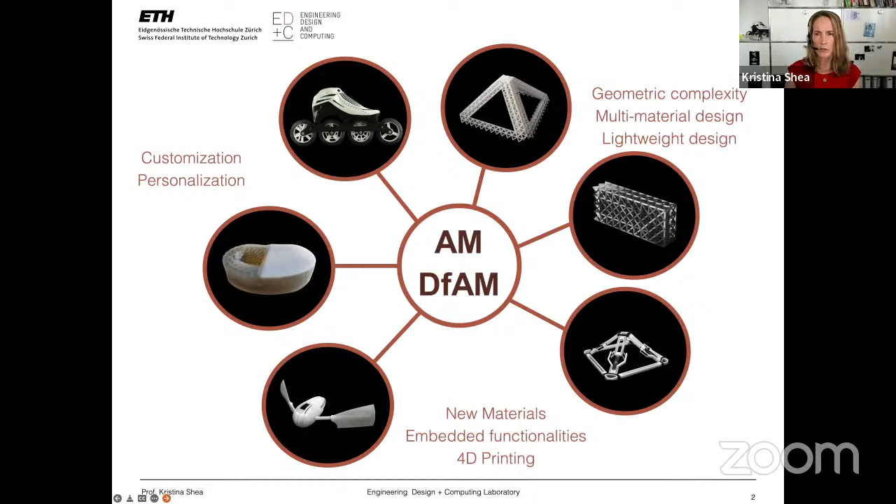We were exploring additive manufacturing and what it could do. For example, we started out by looking at aspects of geometric complexity, multi-material design, and lightweight design, and then moved into what new things we could do with this. This is where Chen's PhD work started: how can we use these new materials and embedded functionalities to create passive machines?

We also work a bit on aspects of customization and personalization. For example, a 3D printed spinal disc that uses multi-material 3D printing to be able to customize the design for a certain person. So we started off by looking at the tunability of multi-material 3D printed structures.

The process that we use for all this work is the Connex machine, which provides a certain set of materials, and we were looking at how we can tune the elasticity in structures. So if we have these three lattices, they are each printed with a slightly different material, and you get a slightly different deformation.

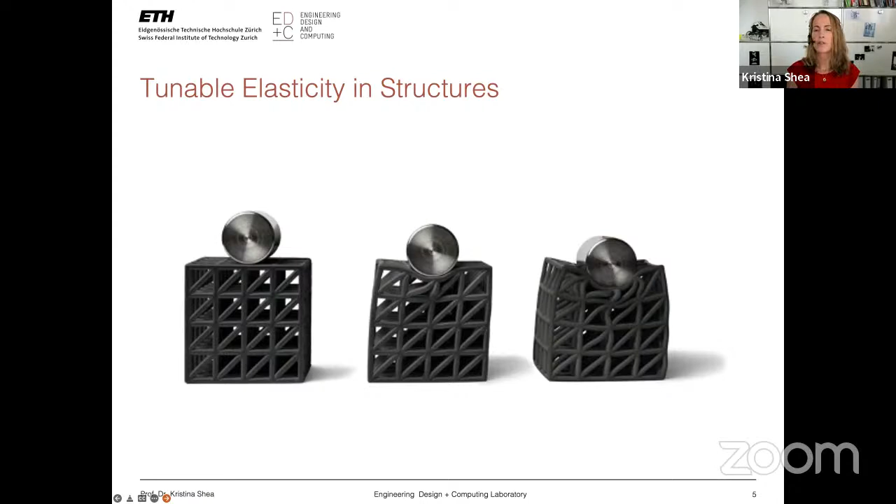We can use this to, for example, optimize lattice structures for the process, either using the multiple materials in the lattice to be able to adapt the structure, and also looking at aspects such as anisotropy in the printing to optimize for that as well.

Starting off from these lattice structures, we then quickly moved into 4D printing. This was also through an initial collaboration with Skylar Tibbits, who coined the term. 4D printing entails the multi-material printing capability of functional materials, meaning they transform over time.

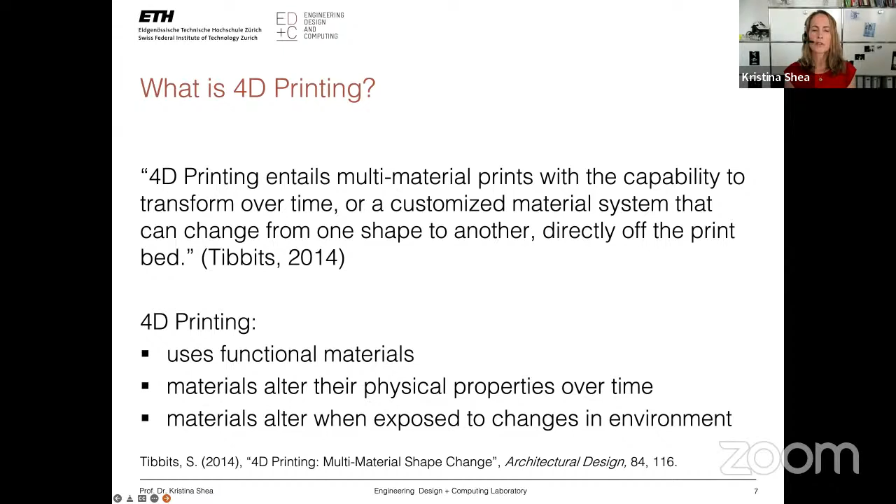The idea is that we can create structures and objects that change from one shape to another directly off the print bed, without embedding new components into the structure. So 4D printing uses functional materials. The materials alter their physical properties over time, and they alter when exposed to changes in the environment, for example temperature, which is what we use mostly.

So what this does is it changes the design problem from a traditional mechatronics one into one where it's the design and the material that creates the machine, rather than additional components.

So what's the potential advantage of this? Why would we want to do this? First, they're low energy—they use energy in the environment, for example temperature, to create their actuation. They're lightweight, since we're not using traditional components like motors, electronics, batteries, or tethers to power sources. This means lighter weight.

They're also more highly integrated and compact, so a deployable design leads to smaller transport volume and less assembly—for example, a deployable solar panel, as you see in the image on the bottom right.

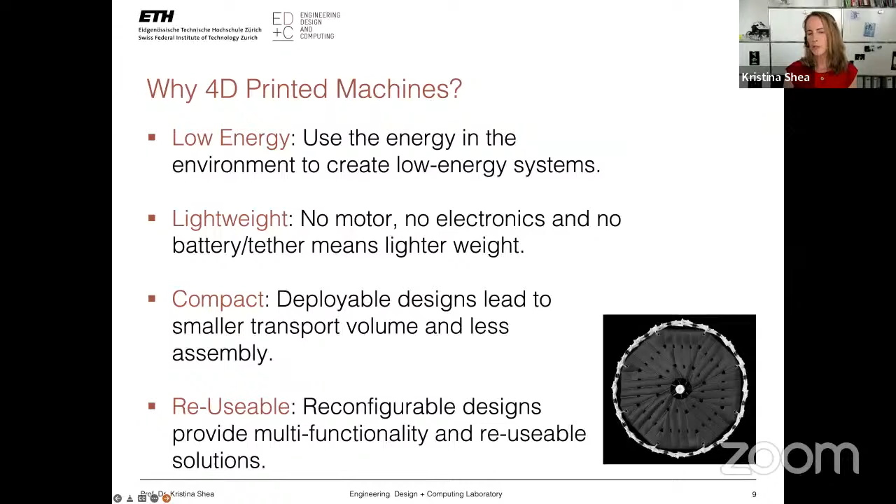And finally, they're reusable, so they can reconfigure themselves and provide this multifunctionality. These are the advantages that I hope to show you.

So with the PhD of Tian Chen, we started by, I asked him to design something that was flat and that could deform itself into, I think I said a pyramid, but he made a dome, which is great.

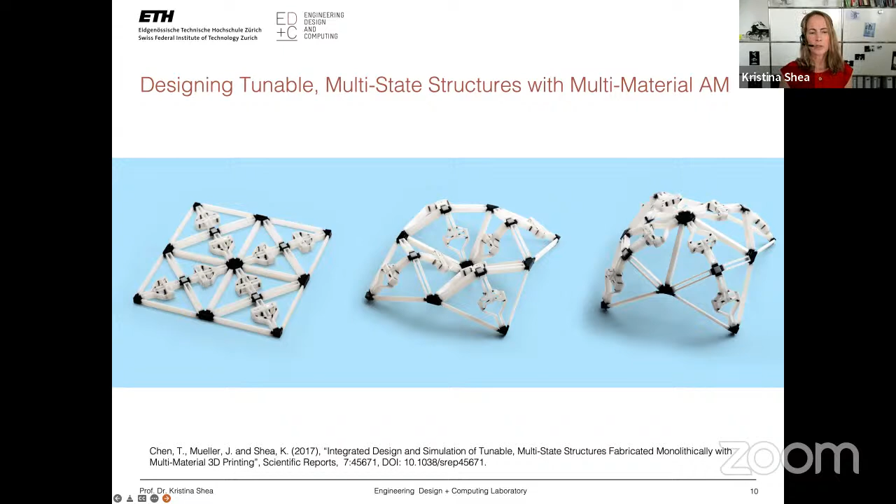So what he did is he created the structure that has bistable joints. These bistable joints are multi-material joints that when you apply a load, represented here by the nuts, they close the actuator. You could also open them, and there's a certain tunable force to be able to close and open these actuators.

This is also monolithically printed all together, so it creates this passive machine. And these are the designs that he can create with this.

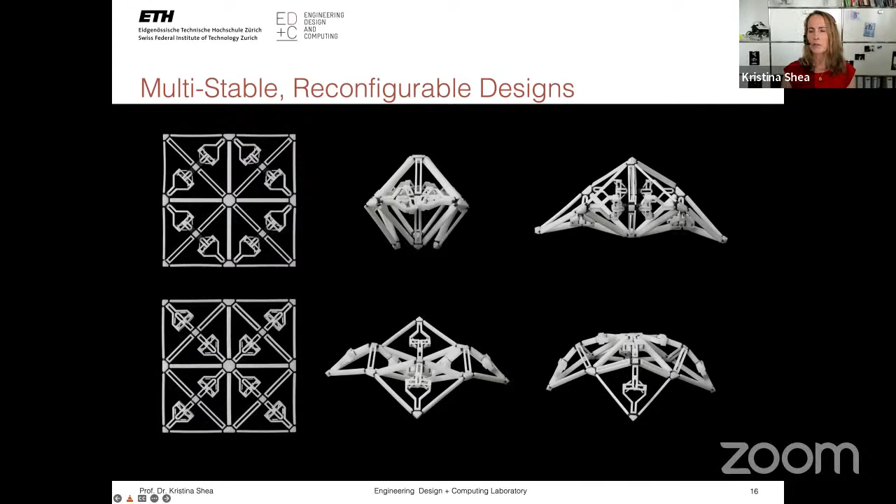He can create networks of these structures with the bistable joints that are reconfigurable, and in the reconfigured state, it's stable. They're also, in the future, load bearing. So from a simple design, a multi-stable reconfigurable design is created that can have these different states.

In our work, we also try to combine computational design. In this case, it was really just simulation via dynamic relaxation used to model the different openings or closings of the bistable joint to create the different designs. So we can simulate the possibilities here.

The next step was to be able to actuate these automatically. It turns out that these connex materials are shape memory polymers, which is highly advantageous for us. So the next step was to add these shape memory polymer strips to activate the structures automatically. It's still the same bistable joint, but here it's activated by these black strips you see in the middle.

They can be designed such that the timing is such that the first opens, then the second, and then the third. So that creates this passive actuation by temperature.

The work we do uses the shape memory polymer quality of the connex materials through a programming model. And the programming of a shape memory strip is different than computer programming.

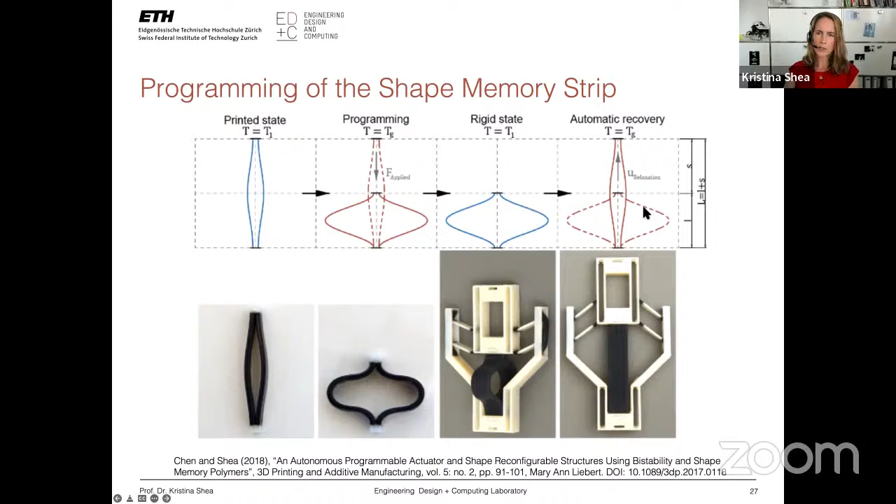What you have is a printed state, and then you heat it to the glass transition temperature, you apply a load, and then you cool it down in the third step. The final step is to recover it by heating it back up. So it's a very simple so-called programming process, but it's programming of the material.

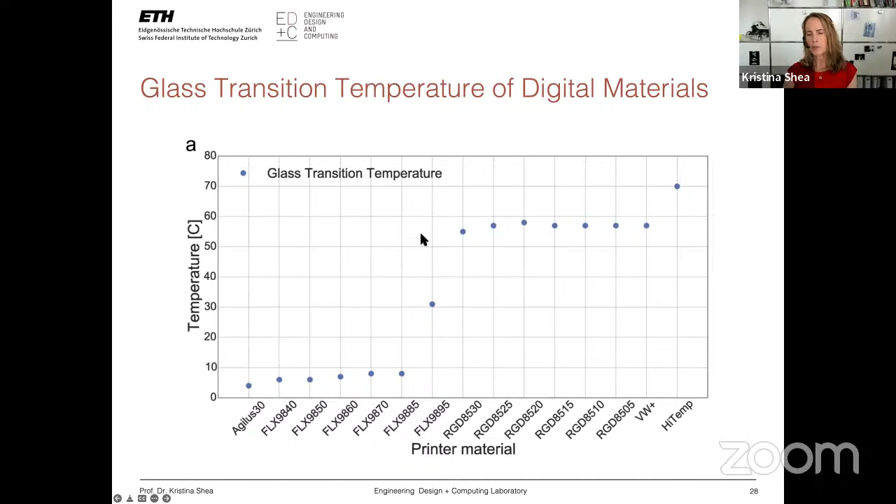We got a little bit lucky because these are the materials of the printer, and it turns out that the soft materials are down here, they have a low glass transition temperature. Then we have this one point of 30 degrees in the middle, and then we have a group, the rigid materials, at a higher glass transition temperature. So this is beneficial in the design to use these different properties.

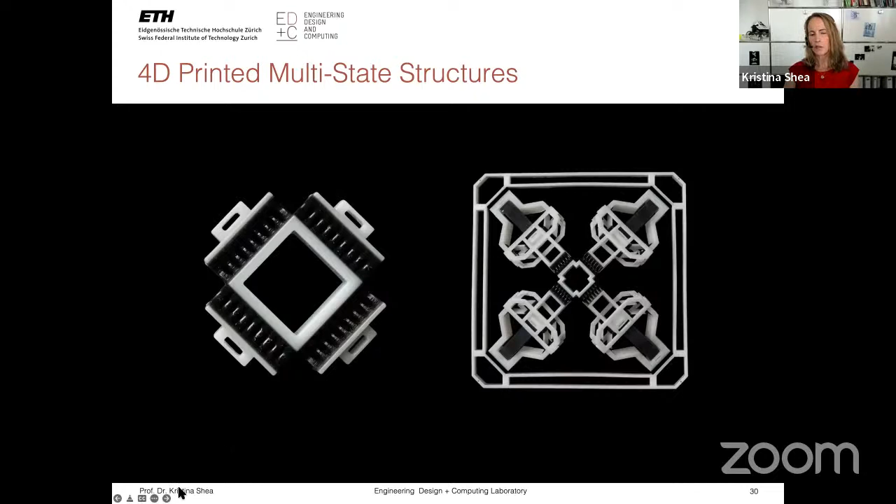What I think I want to bring out as well is that in these designs, it's very... I still love the details of the design. So this is the middle joint, and these details are also what makes these designs work. It really is the design and the materials in a very elegant way to create these passive structures. So here what you see is the structure.

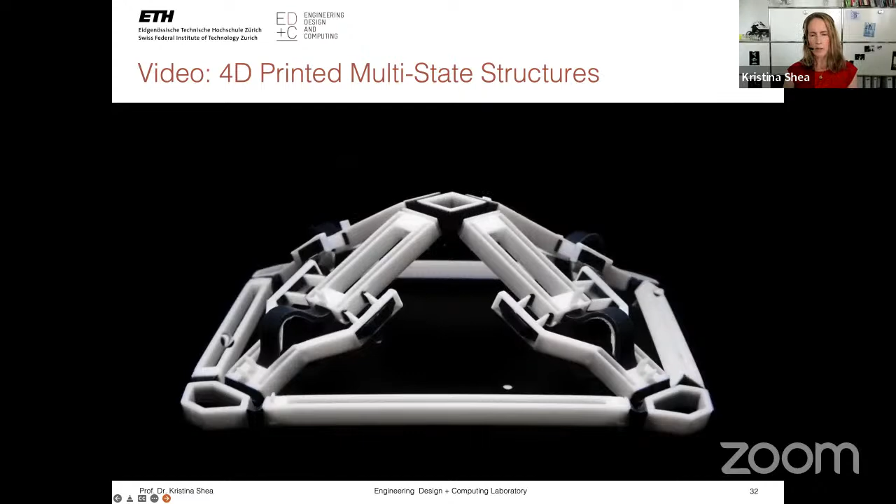It's in a temperature bath, a water bath for the temperature, not that it needs the water, but it just provides uniform temperature. And you can see it pushes out into a stable state through these shape memory polymer strips. It's load bearing, which was unique at the time when this was published.

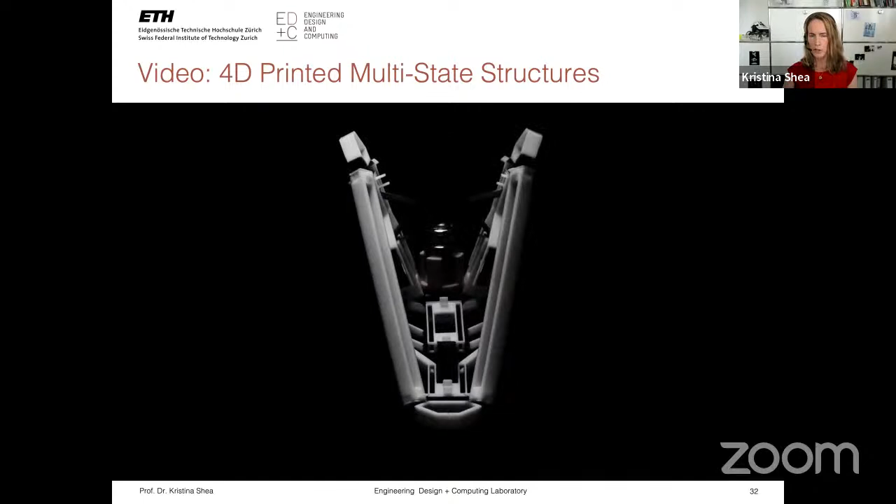And it can also move to, I'll just fast forward a bit, move to another state. In this state, it also carries a load as well. So these are these multi-state structures, and this was a big part of Tian's work.

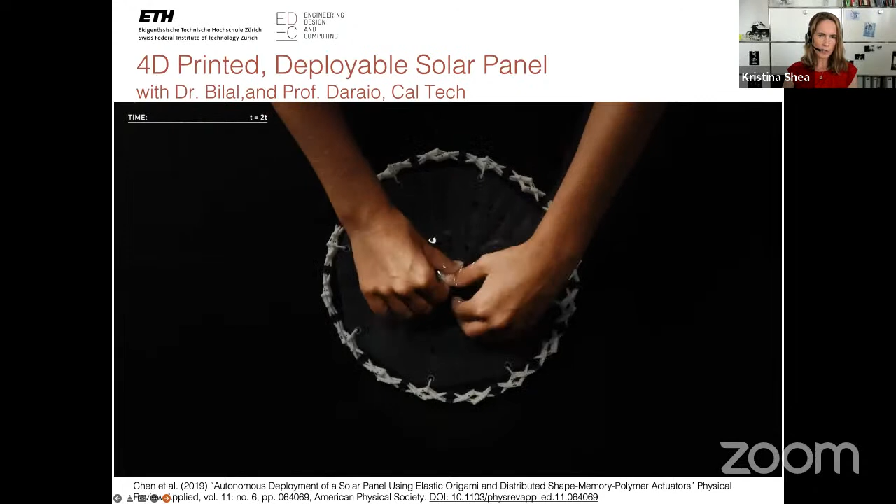Another project that he carried out with Dr. Bilal and Professor Daraio at Caltech was to use the principles of this to create a deployable solar panel. So here's the solar panel, it compresses to 10 times.

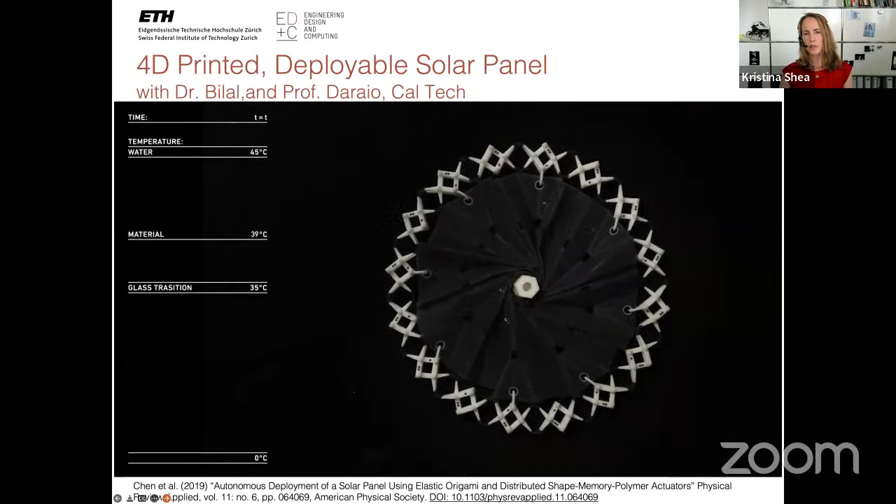So it's again this material programming aspect, and then it will expand out using a scissor mechanism on the outside, also with some shape memory polymers. So it expands out in about less than a minute, expanding 10 times in less than a minute. There you can see the joints, the rigid and soft materials next to each other, and here it's going up to a temperature of about 45 degrees. So it's using the temperature to actuate - there's no single individual actuators on that.

So the next example I want to show you in this area is 4D printing for shape morphing. While I like to look at machines and creating passive machines in our group, the last two PhD students who worked on this topic looked at shape morphing. The reason is that we wanted to go back and look at the computational design tools and methods that could be developed to help designers and engineers create these 4D printed structures.

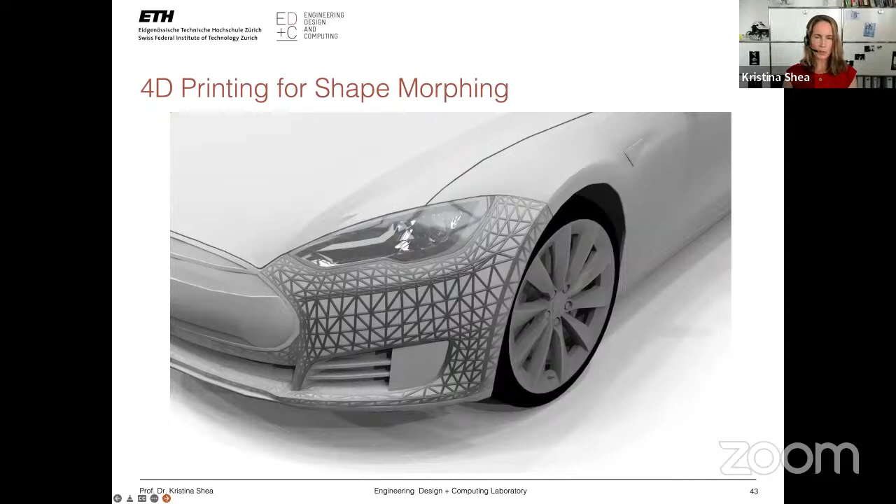And so we all know and like lattices. So we went back to this saying, okay, if you had for example a car body and you wanted to change the shape of that to improve aerodynamic performance - so it changes shape in response to, let's say, pressure - that would be a nice application of 4D printing. We actually had a project with industry on that. It could also be a shape morphing airplane wing as well.

And here the principle we're going to use is a bit different. So here are the materials, same materials I showed you before, and same glass transition temperatures. But now this work was done by Thomas Lumpe in my group, and what he did is looked at the change of the Young's modulus when you heat up the materials. So before we were looking at this glass transition temperature and the programming of the material. Now the switch is to say, okay, what happens to the Young's modulus and the compliance of the material as you heat it?

So when you heat the material, he's looking at these two materials: the high temp material and Vero White, which is a rigid material. You see here on the right-hand side that the Young's modulus, when you heat it, changes not uniformly between those two materials. At this temperature, about 65 degrees, you get a big spread between the Young's modulus. He used the 80-degree temperature because it was just more reliable - these temperatures aren't exact when you're heating the materials. There, the difference in the Young's modulus is 305 megapascals and 8 megapascals.

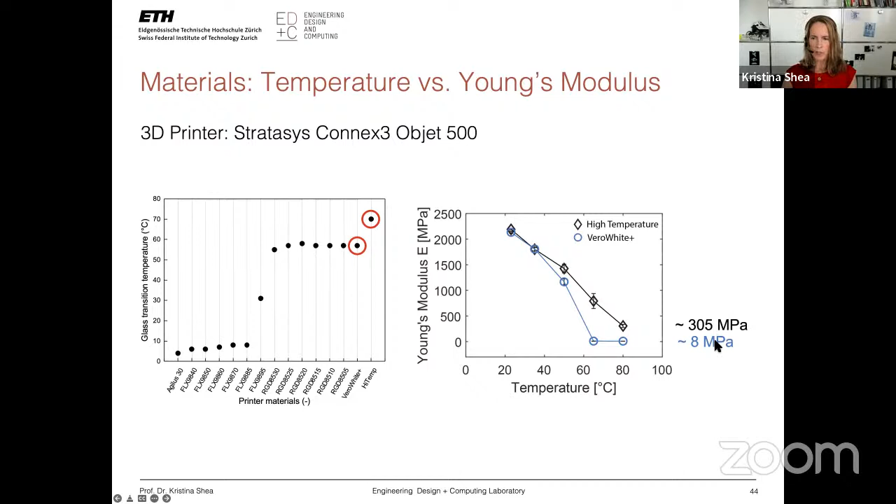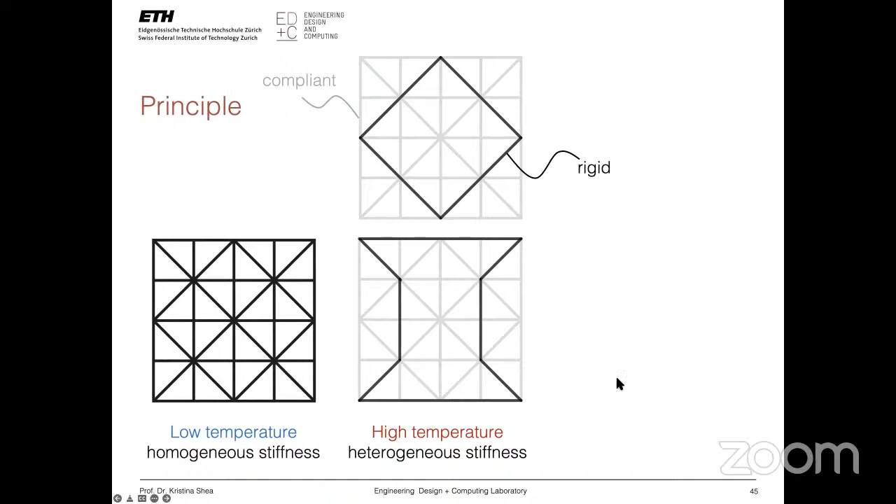So it's significantly different, and so he wanted to get rid of this programming step that was needed for the bistable actuators that Tim had. What he thought of is, okay, if we have a lattice structure at a low temperature and we have a homogeneous stiffness, then what happens if we add in some compliant members and some rigid materials? In this case, we can then heat it up and get heterogeneous stiffness. In the heterogeneous stiffness, the structure will deform. So we apply a load and get simple actuation and a desired deformation, without programming individual members like you saw previously. So that was the goal.

So this creates a different type of programming cycle. We have a lattice structure, we heat it up, in this case to 80 degrees. We apply the load, and then we get the deformation depending on the distribution of the materials in the structure. We cool it down, it locks that into place, and to recover back to the initial state, we heat it back up again. So you still get this programming cycle, but you don't have to program individual members - you program it all together.

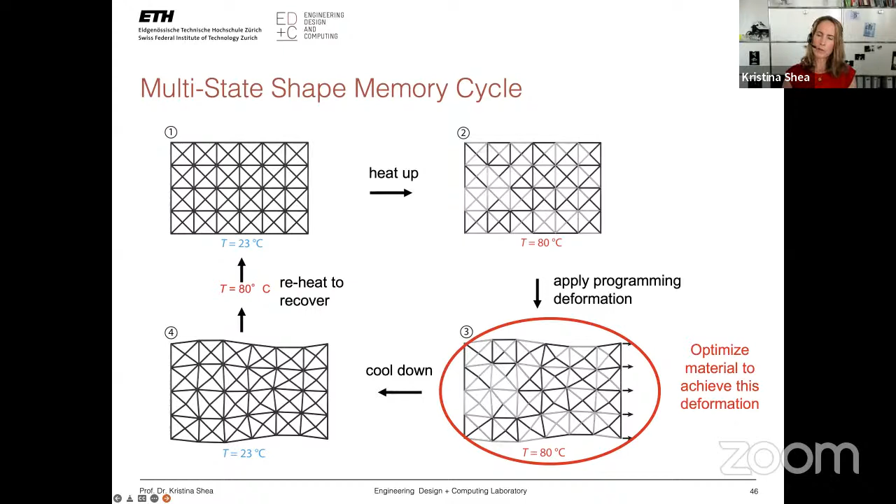And so it became an optimization problem - to optimize the material distribution to achieve this deformation. The optimization problem is: we have a lattice structure, and we're going to optimize for a given deformation U, subject to the normal finite element equilibrium equations. These are just considered simple truss bar members. What we have is we want to use these two materials and distribute them in the structure, and he uses a penalty function to do this. So he creates an optimization model that initially uses gradient-based optimization with the penalty function to create the initial distribution.

And then the second step is done by a genetic algorithm to push the members in the structure towards the two different materials, and then you get the optimized structure.

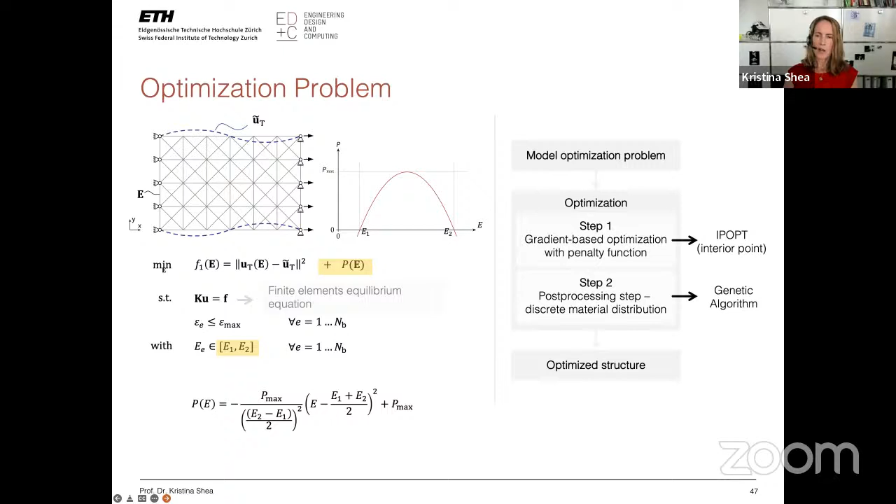So I'll show you the results here. We have 3 different examples. It starts with 2D on the left-hand side with 154 bars, then we have 896 bars in the middle, and 3,516 bars on the right-hand side.

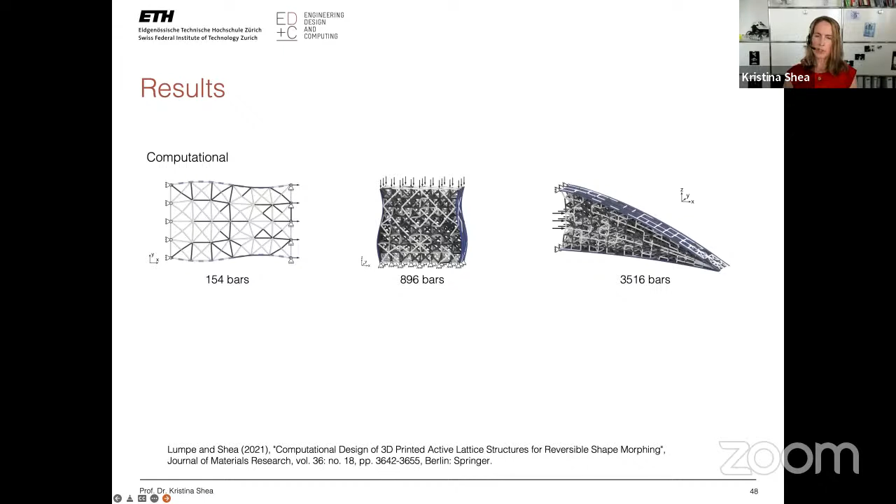Okay, so I'll just wrap up with a few conclusions and challenges. So what do 4D printed machines offer? They're low energy systems, so they're using, in our case, temperature, but they could also be activated based on other things like light or pH and so on in the environment.

They're lighter weight and use less material in comparison to traditional actuated systems because we don't have the actuators, especially the motors and so on. They also create a more integrated system in that way. They have a smaller print and transport volume, especially when we're printing something flat and then deploying it up. And they have multifunctionality and reuse and provide some new functionalities.

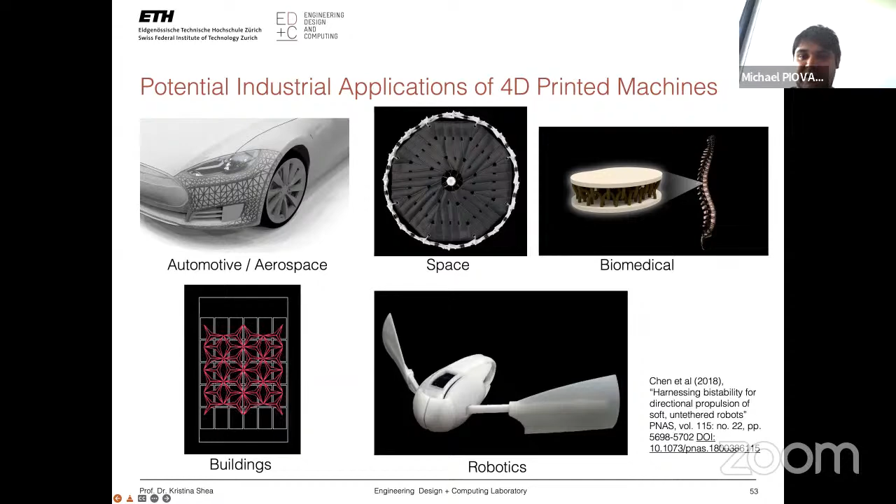The first question I have is with regards to the monolithic manufactured materials. Did you investigate how often they can be actuated before they break? Are they durable? Yes. So I used to have in this list of 4D printing challenges the fatigue or reliability of the materials we have. It depends on the design, of course.

I think in Tim's examples, if I remember right—Tim, correct me if I'm wrong—it's about 20, 25 times, and it really depends on the joint design. That's where, especially with bistable structures, the joint design is so important. I still love looking at these models in my office because I know the sweat and work that went into making structures that can deform that way. It's not easy at all.

For this, I have a follow-up question. Are the materials sort of just designed by someone else and then you adapt them? Or do you also have collaborations where you specify what kind of properties you'd like for the material, and then ask material scientists if something like that could be developed?

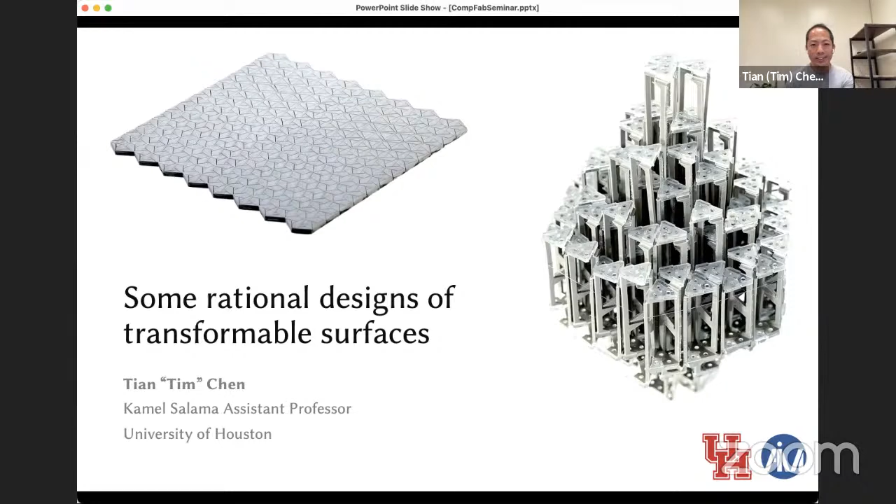These are two works, one of them is actually really recent. In all of these works, we're always trying to do this matching. We're trying to find a structural material system and then abstract their deformation so that we can use some sort of mapping to go from 2D to 3D, or from one 3D state to another 3D state.

In my PhD already, we started to look at this with Kristina, over the course of a summer, to see if we can use Chebyshev net to calculate exactly how much we need the diagonals of each square element to lengthen or contract in order to get a predictable Gaussian curvature. That's the first work I did in that topic.

Moving to my postdoc time, we started looking at conformal mapping to be able to abstract this deformation. But then, of course, we need material systems that can expand isotropically. And lastly, we started looking at anisotropic contracting or lengthening.

So this is a prototypical system. We have these air channels, and when you inflate them, the lateral direction contracts because it goes from, let's say, the length to the diameter, whereas the length of the tubes doesn't really change. This is kind of exactly the reverse of a liquid crystal elastomer channel, which lengthens in the length direction while the diameter doesn't really change.

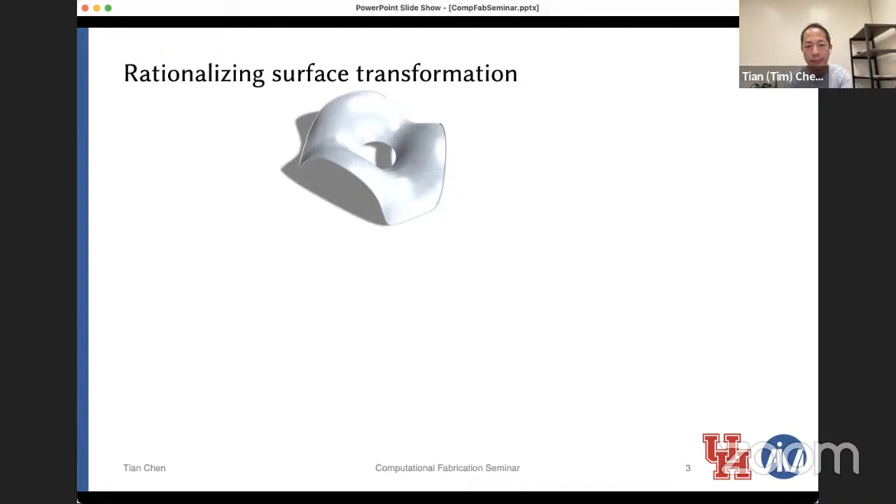Using the exact same differential geometry concept, we're able to come up with two different material systems, actually more than two, but these are the two I worked with. One uses kirigami cutting of a rubber sheet to go from the 2D to the 3D state in a bistable fashion. When it's in this 3D state, it can stay in that state.

The second, very recent work, not yet published but I think I can talk about it now, is in SIGGRAPH of this year, which uses umbrella mechanisms to go from a very compact yet 3D state to a much larger 2.5D surface, even though the underlying algorithm is actually really similar.

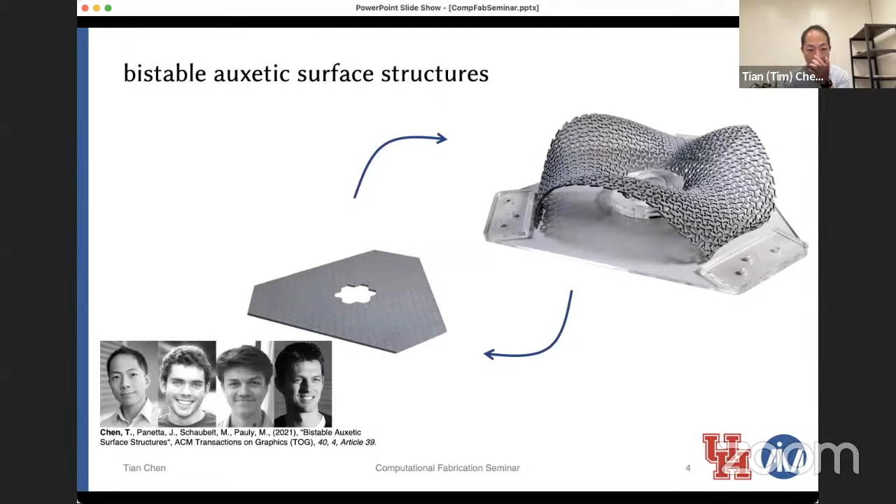So to talk about the first one first, bistable auxetic surface structures. These are my collaborators and advisors at EPFL. We start by looking at the regular linkage deployable systems that was done before I arrived.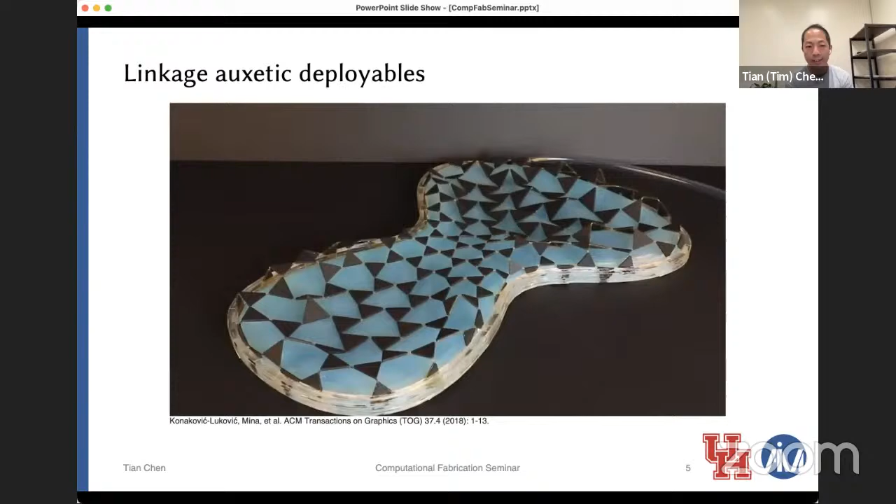This requires a linkage system with triangular elements, and we need some sort of actuation mechanism to make it go from 2D to 3D state. And there's always the lingering question of what happens at the boundary.

With bistable auxetics, we've pretty much seen this already. With a regular linkage, you can expand to a factor of 2 in length. Yet with the bistable triangular auxetics, even though the base material is exactly the same rubber sheet, when you expand this, it stays expanded. You have to apply mechanical force to have it go back to the original state. But because the expansion ratio is the same everywhere, you just get a bigger sheet.

So my question is, can we design a planar surface that encodes its desirable 3D state and have it deployed to that stable 3D state? And then we can define the mechanical characteristics in that 3D state.

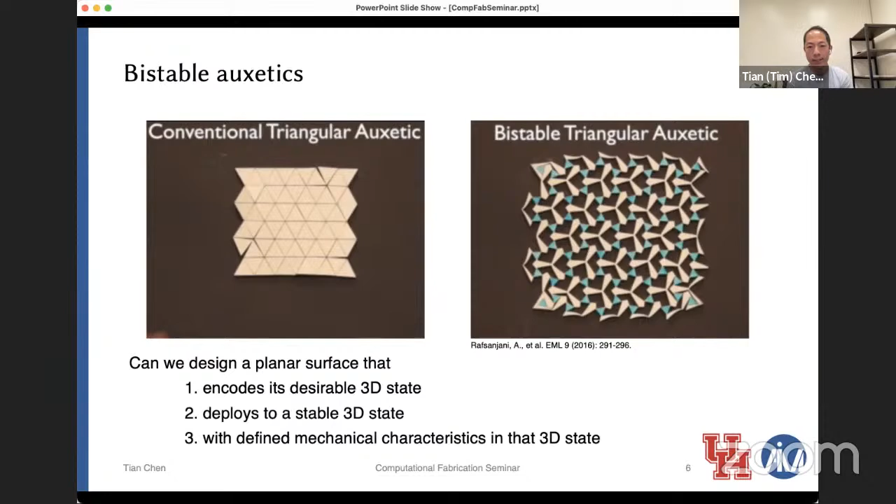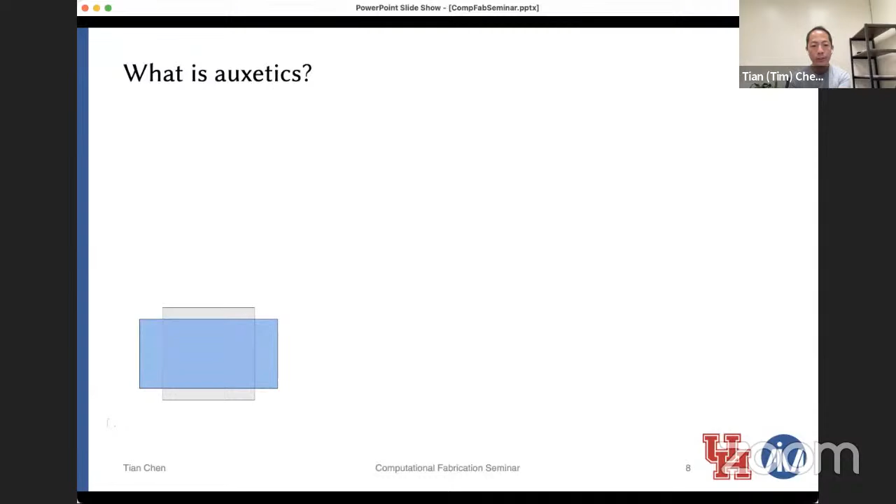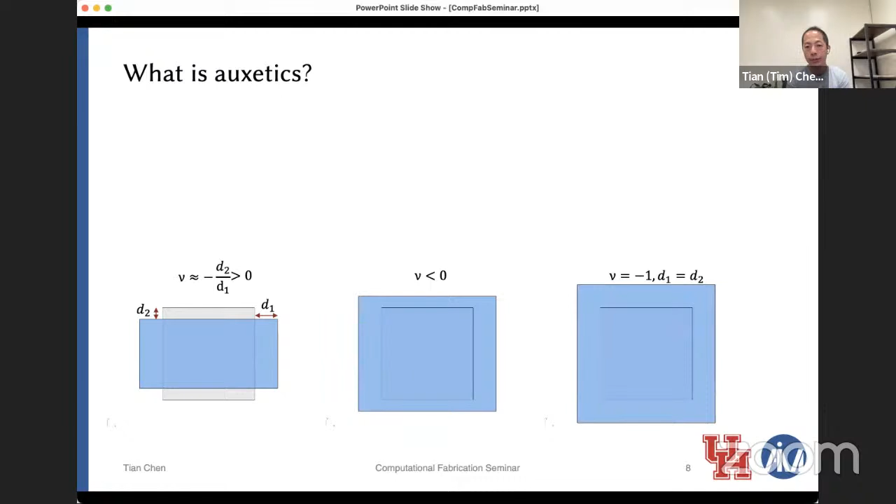So first, what is auxetics? I'm sure most of you are familiar with this already, but to reiterate: a normal material when pulled contracts in the other direction. We can define the Poisson's ratio as roughly the ratio between these deformations. Then we have materials with a negative Poisson's ratio, so when tension is applied in one direction, it also expands to some degree in the other. And then we have materials with exactly a -1 Poisson's ratio, so we deform exactly the same amount in both directions.

Fortunately, we see that this regular triangular linkage does exactly this. If we look at each hexagon as if it's a solid element, it exactly expands isotropically in a Poisson's ratio of -1 fashion.

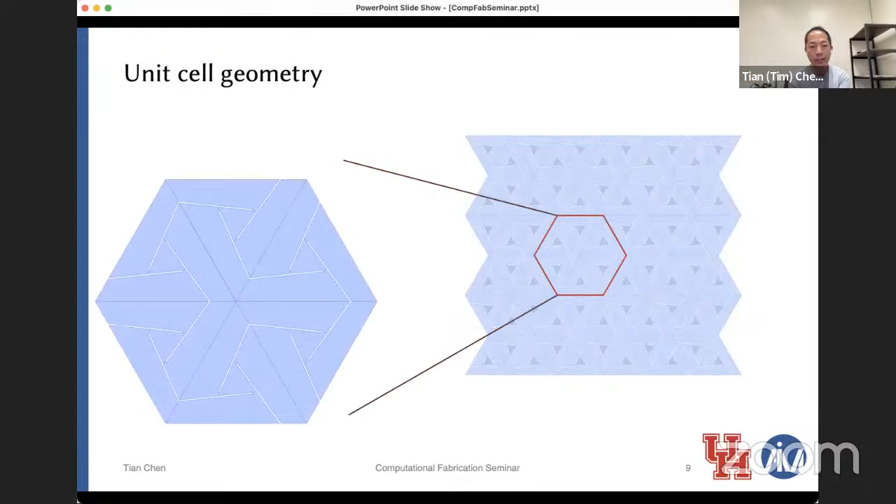So let's look at the unit cell geometry of the actual cutting pattern. We can abstract this into a hexagon featuring 6 mirroring triangular elements with these cuts, and parameterize this by focusing on the triangle using T and theta.

We look at the rotation of the inner triangle to establish the deployment. By changing theta, you're actually changing the orientation of the cut line, making the inner triangle smaller and smaller. Changing T does exactly the same thing. So just by intuition, you can see that the smaller the triangle is, the less expansion we're able to get.

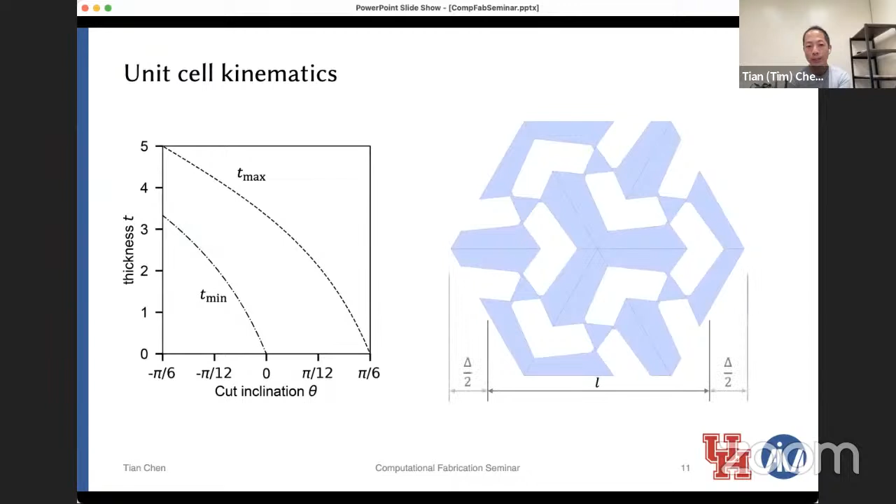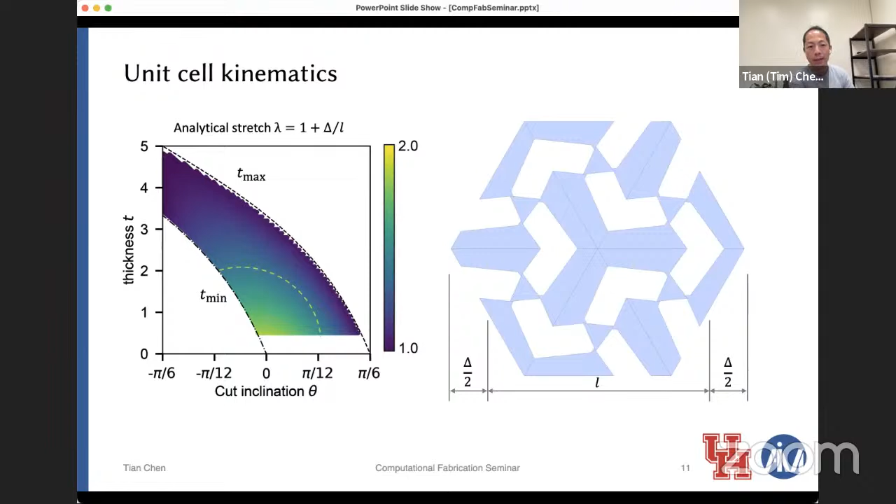So if the original length is L, we can through kinematics calculate exactly, or predict exactly, what the expanded state is, and we denote this as delta. Through some equation manipulation, we calculate the expansion ratio, or stretch, which ranges from 1 to 2. What's interesting, if you look at the color map, is that there are some isolines, meaning there are different parametric combinations that give you the exact same stretch factor. So now we have an additional variable to play with.

And we turn to mechanics to answer which unit cell we should pick to get us the expansion ratio we want. So to study the mechanics of these unit cells, we first tried to do an experiment.

Building this very complex experimental setup that replicates this periodic boundary condition, we're able to mechanically test the expansion behavior. This was quite successful in terms of getting the final state, but not very successful in getting the intermediate forces, because each unit cell kind of snaps at a different time. So when you look at the force displacement curve, it's a mess basically until the very end. This isn't exactly what we need, because we need to know the behavior of each individual unit cell at all stages of the stretch.

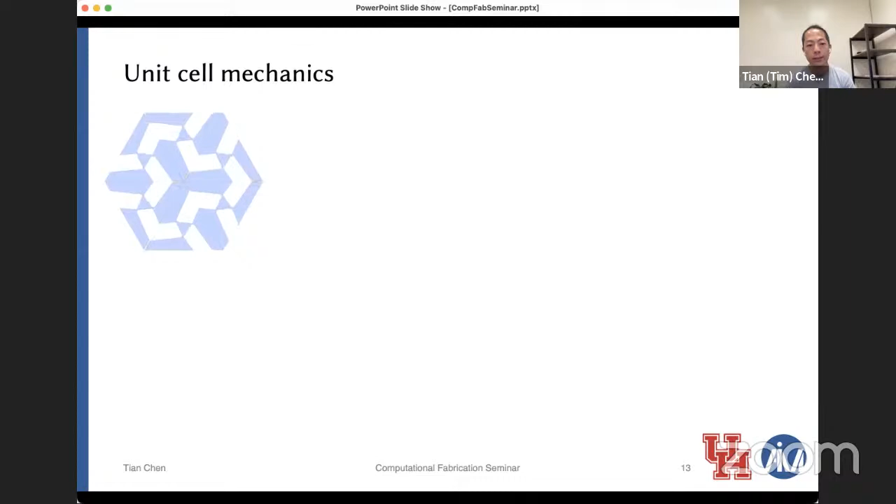So we turn to FEM, and we notice that there's a quantifiable strain that happens at the middle of the expansion, which I denote here in red. These red regions are actually the stretch of the material, and this red region closes up once we fully expand the unit cell, back down to a completely kinematically compatible state.

So we built our own unit cell simulator that attempts to minimize the total energy of the system by applying an average deformation gradient. Then we're able to calculate from there.

Here's the strain energy versus strain diagram from the FEM simulation. You can see there are two local minima in the strain energy landscape, indicating there are definitely two stable equilibrium states. And since we can easily differentiate this curve, we get the force versus strain diagram typical of a bistable system. So now, what do we pick?

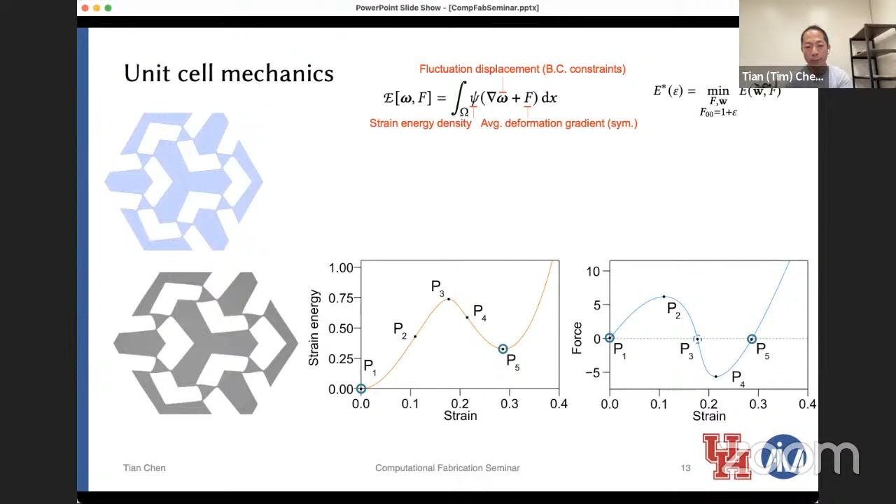Knowing the mechanics of the unit cell, we have different criteria we can use to pick the most ideal unit cell for the purpose. First, the strain of the hinges plays a significant role in determining the stability of the structure. So the first choice is the difference in energy between the unstable equilibrium, some intermediate state, and the second state, which is the deployed state.

The second thing we can optimize for is the slope at the second equilibrium state, which is exactly the tangent modulus of the system at that point. This gives us as stiff a system as we need in the deployed state. So that's what we're going to use.

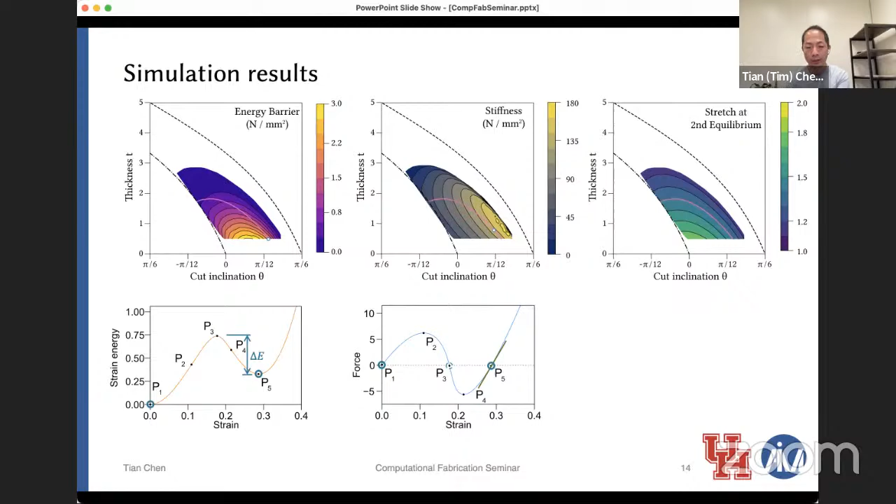Unfortunately, if we plot the contour map with these two quantities in mind, the maxima don't occur at the same place. So by maximizing for one, we have a trade-off with the other. But that's okay, so we choose stiffness as our criteria for picking the unit cell.

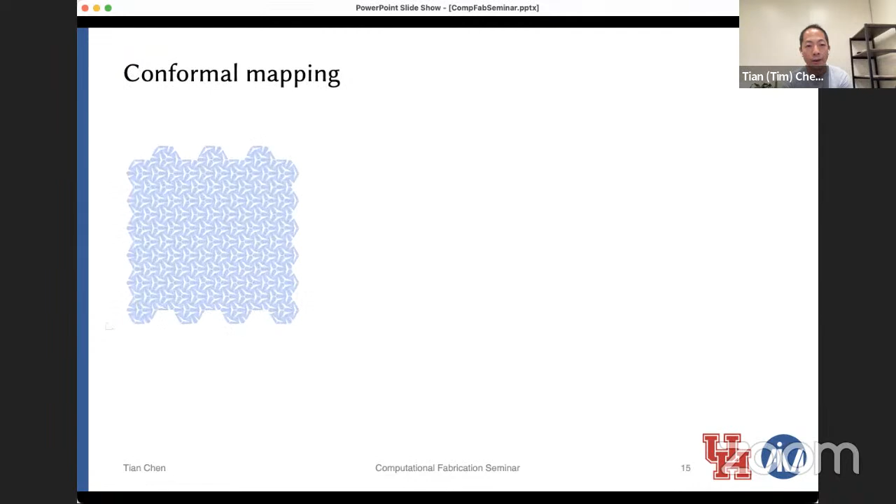So now we go to the conformal mapping part of this. As I said, if I tile the same unit cell everywhere, I just get a planar expansion of the structure, which isn't what we need because we already know how that works.

Taking inspiration from cartography, where we map a globe down to a planar surface, due to distortion we have Antarctica and northern Canada appearing much bigger than they actually are. We know we need to change the area of each square without changing the angles between the local elements.

If we can satisfy this condition, then the deformation is conformal, and we can calculate the Gaussian curvature based on the difference in the length change of neighboring elements.

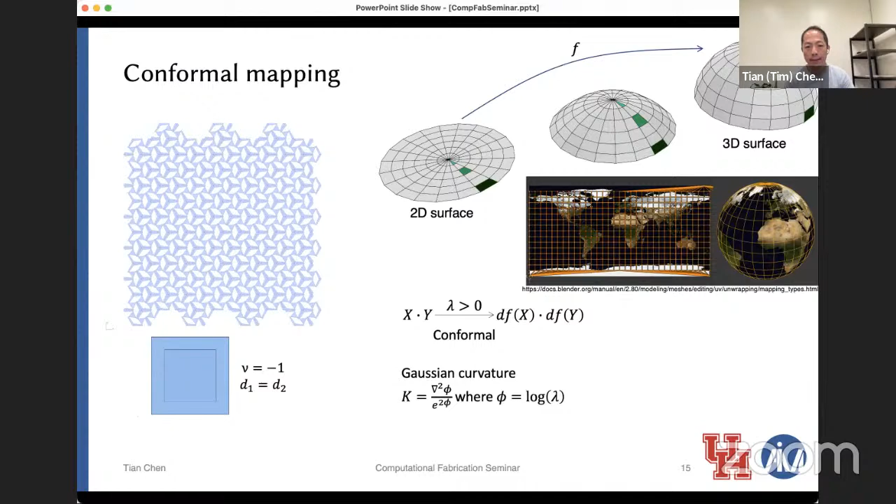So we have a generative algorithm in mind. Given an input surface, we first calculate the conformal factor that allows us to flatten this into the planar state. Here I'm using light green for a lot of expansion and blue for almost zero expansion.

Then we look up our pre-computed table to find the parameters that give us that particular scale factor. From these parameter combinations, we find the unit cell with the stiffest behavior, and tile them back into the planar state with different parameters, triangles tiled together. Then we can easily deploy this into the 3D state.

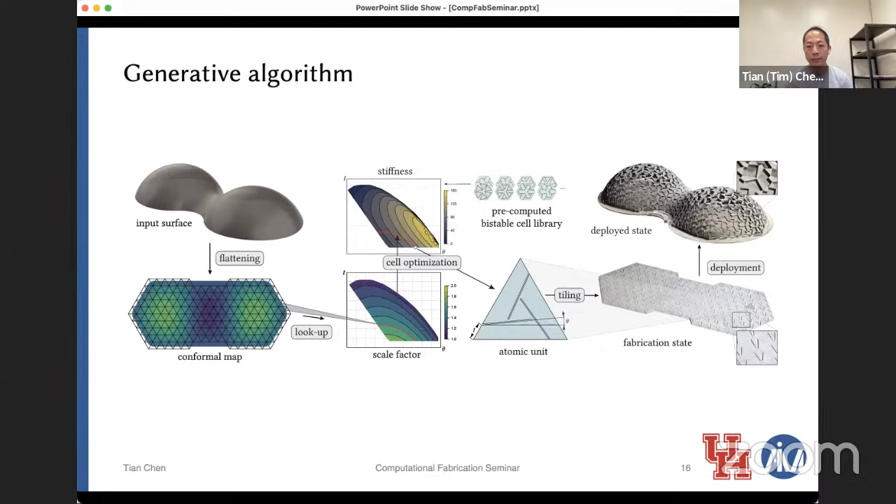One thing to note is the boundary condition. The boundary is largely free, except in very limited places where we need a bit of support, otherwise it tends to flatten due to isometric deformation. Otherwise, the structure is freestanding.

With a simple example of a spherical cap, we intuitively know the middle needs to expand more than the edges. We can vary whether the middle expands a medium amount and the edge expands none at all, meaning we can clamp the edge if we want, or the middle expands a lot and the edge expands around the medium amount.

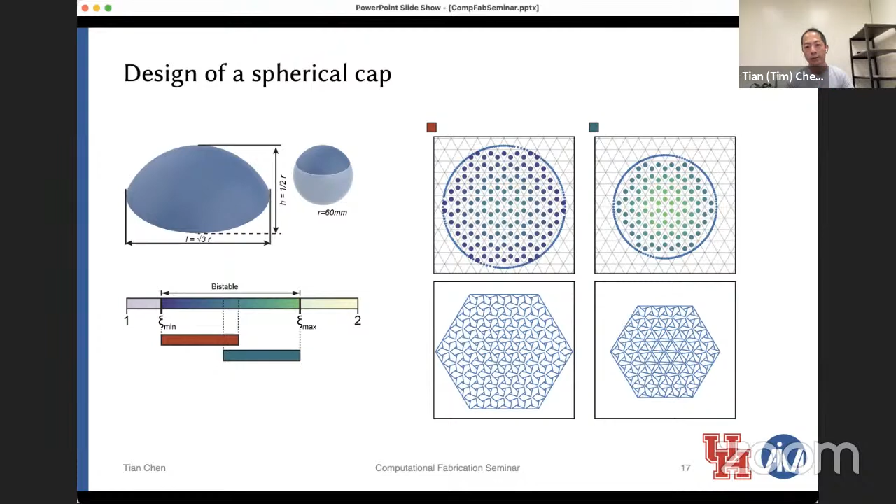For deployment, this material isn't smart or functional in any way, so we need to use our fingers to deploy this. Fortunately, the snapping of one unit cell triggers the snapping of the neighboring unit cell, so the deployment remains quite easy.

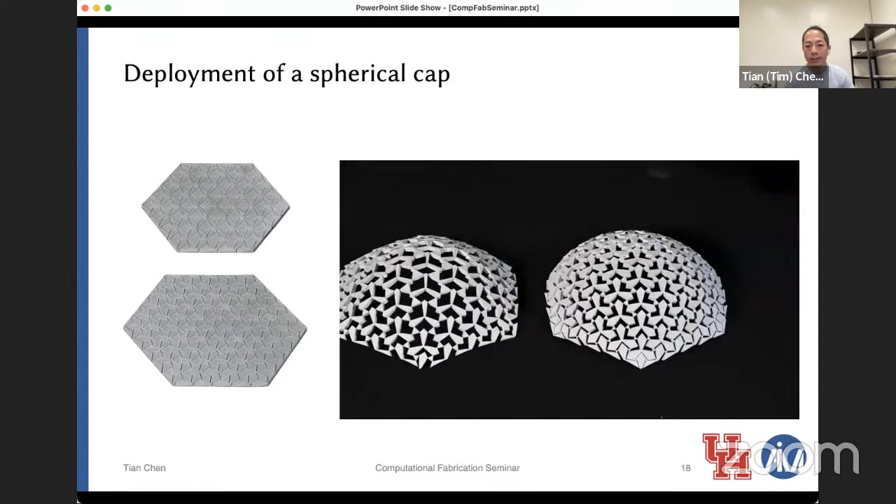And of course, we can use photogrammetry to construct the 3D geometry, or we can use other techniques like CT scanning, for example, to get a more accurate view of the geometry. But either way, it gives us the structure that we need.

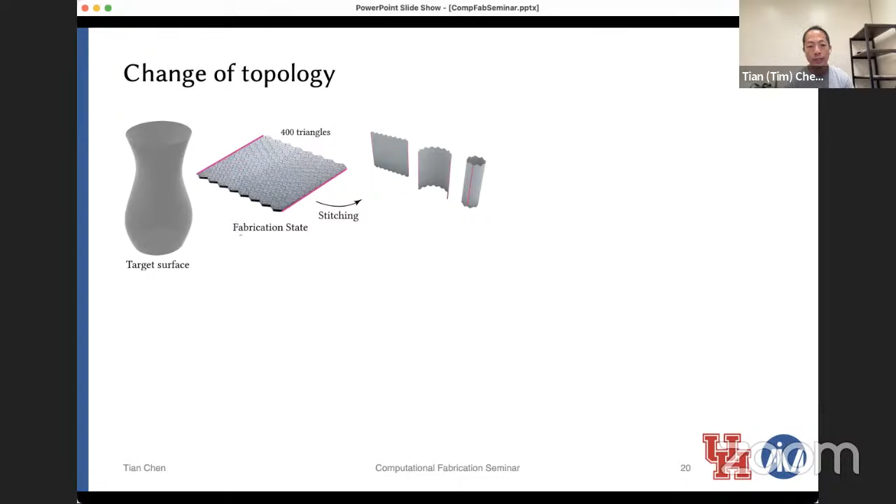We can also change the topology of the system. We can have a target surface with a cylindrical topology, still fabricate it flat, and then glue the seam together prior to deployment, because we know the triangles will rotate in a compatible manner. So we have a cylindrical system first, and then deploy this into the vase shape we wanted.

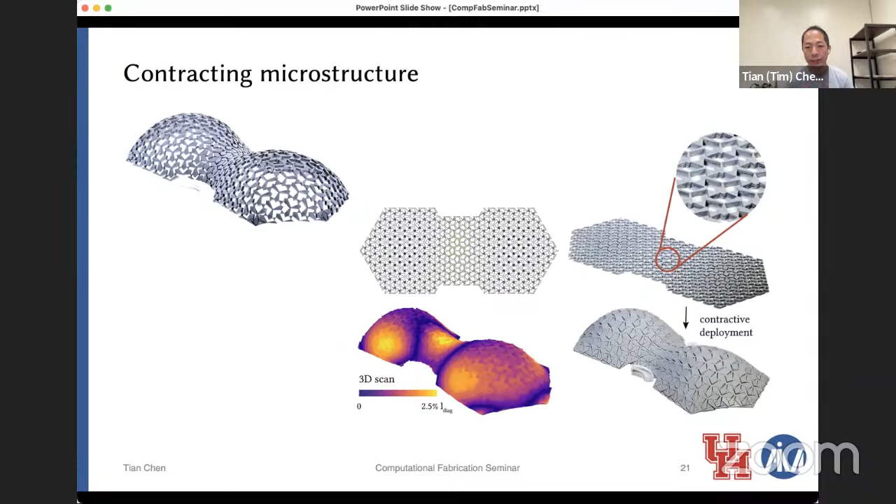There are other techniques we can use. Since the Gaussian curvature is controlled by the change in length between neighboring elements, we can have different contractions happening between neighboring elements to create a porous planar state that deploys by contracting into a more or less continuous 3D state. And of course, we can make more complex geometries too.

Keep in mind we do this because the fabrication is so simple. We just take a commercially available rubber sheet and laser cut it, and we can produce these sheets almost in mass.

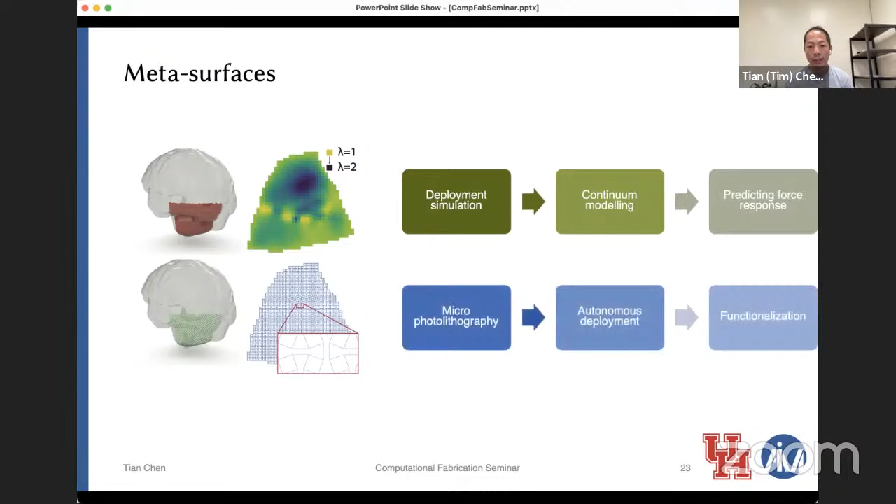What's next? This is a very good tool to use because it's scale invariant. As long as we can satisfy the expansion ratio, we can make this as big or as small as we want. So currently I'm working on figuring out how to simulate the deployment of a whole sheet, and how we make this much smaller or much bigger.

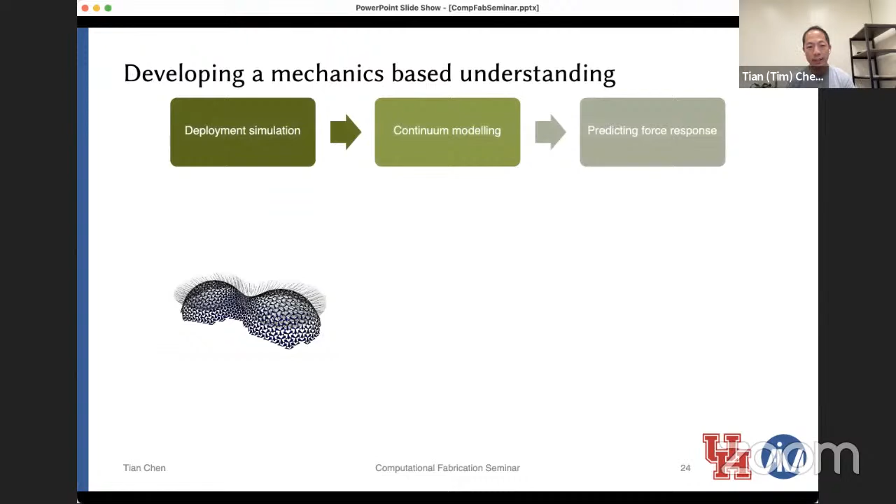For deployment, it's a bit tricky because each unit cell in itself is bistable, so we have a lot of negative stiffness areas to consider. So far we have limited success deploying arbitrary structures. The next technique we may use is to abstract the mechanics of each unit cell into a continuum element.

Lastly, we did some preliminary tests on the mechanics of these structures. Keep in mind, during the design we don't consider boundary conditions at all, so of course this has to sit on something. By placing a dome structure on the table and applying a load at the apex, we're able to measure the reaction force, and judging by how predictable it is, I think it is doable to figure this out experimentally and numerically.

And lastly, how do we make this much smaller? As I said, because it's scale invariant, we can totally use techniques in the micro photolithographic arsenal, using wafer technology to make these.

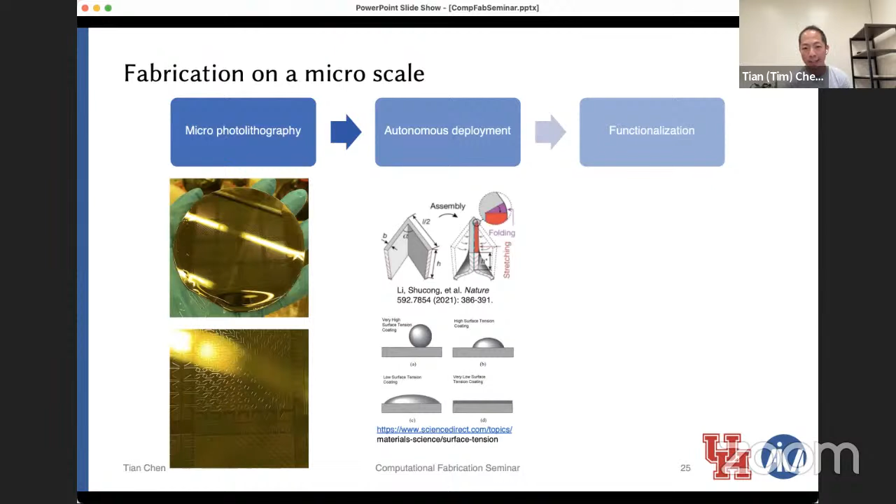And how do we deploy this autonomously? Using what Kristina mentioned about 4D printing, how do we deploy this without using my hand? And lastly, how do we functionalize this to achieve an engineering kind of application?

So these are some of the future directions for this project. Now I'm going to talk a little bit about the newest work we did, which, like I said, is based on the exact same technique. But as you can see, this is a 1-to-1 scale geometry here.

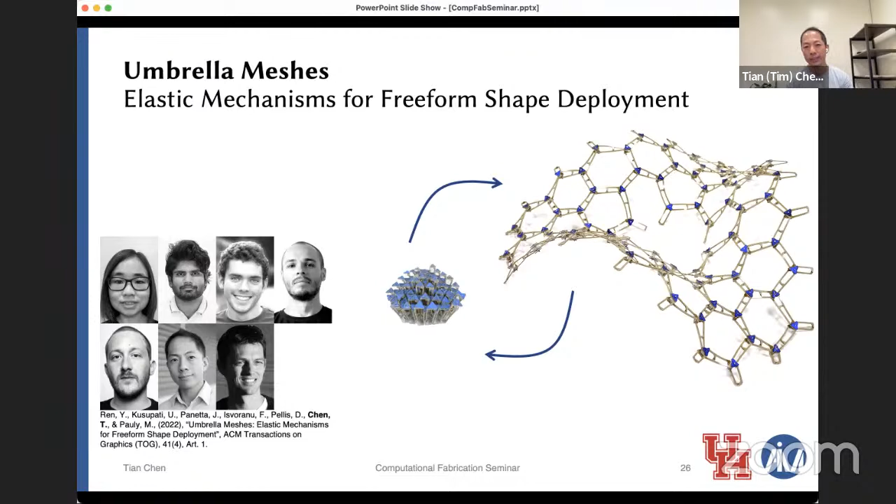The expansion ratio we can achieve with this is much, much bigger. In fact, as you will see, it's infinite. So we call these umbrella meshes, because we're literally connecting umbrellas one next to another.

So the unit cell mechanism is relatively simple. If you look at our umbrella, you can see we're trading the height of the umbrella... it's a bit slow, there we go... we're trading the height of the umbrella for the area that it covers.

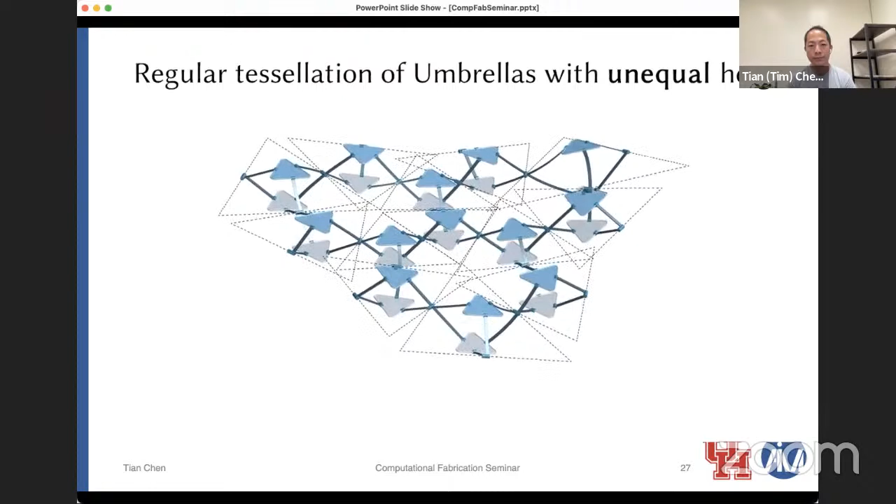Of course, if we tile the same umbrella next to each other, we get a planar expansion. But if we tile two umbrellas of different heights next to each other, then we get an out-of-plane deformation, just like we do with the bistable structures.

What's interesting is the footprint of the umbrellas when contracted is exactly the same — it's just the height that dictates how much it expands. Due to the incompatibility, there's elastic deformation that happens during the expanded state.

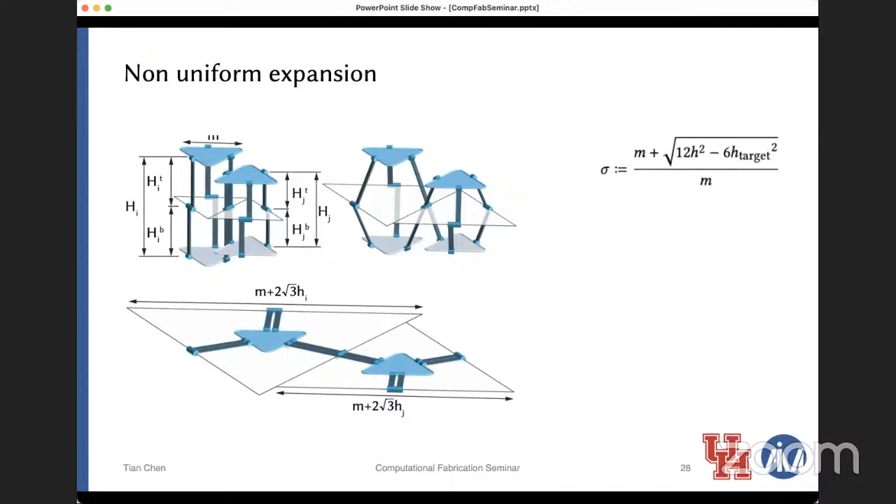We can exactly calculate how much they should expand kinematically, relatively easily, just by using the height as the input parameter and calculating what the expansion ratio is.

For deployment simulation optimization, again we have several contributing energies to account for. The first is the elastic energy of the rods, which we model as discrete elastic rods. The second is the potential energy of the deployment force needed to get the whole system to start deploying. There are several constraints we must use, both in physical fabrication and in simulation, to ensure the angle of rotation does not exceed a certain bound.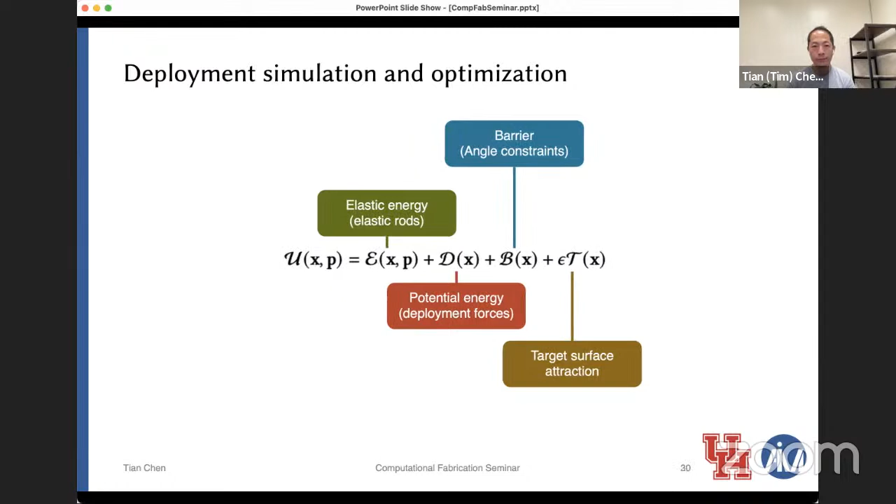And the last is a bit of a fictitious energy we use to attract the deployment towards the target state — of course, we weigh this to near zero near the deployment. We minimize the total amount of energy by using the height as the optimization variable.

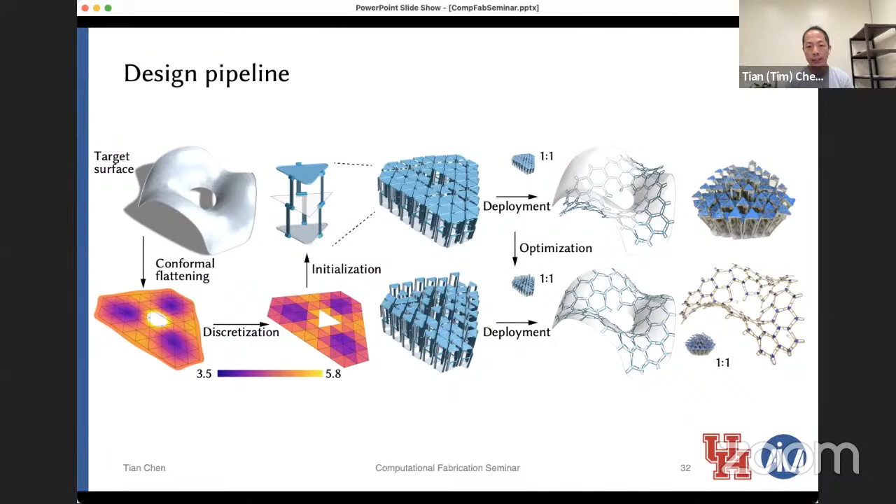So the design pipeline, again, will look reminiscent of what we had before. We first conformally flatten the structure to the planar state. We overlay a grid of triangles and assign the scale factor to each one of these triangles. This is the entire pipeline of the system. Once we do the triangle assignment, we have an initialized system, which we continuously modify through a gradient-based optimization to get the final structure.

Of course, the height cannot go to infinity in real life, so we cannot actually have a full sphere, but we can approach that much more rapidly than what we did before.

One remaining thing we noticed almost by chance is that when deployed, the structure is stable. This wasn't what we were aiming for from the get-go, but it does exhibit a local minimum in the elastic energy landscape, just like what we did before with the bistable structures. So when we deploy the sphere, for example, the structure goes into a stable 3D state.

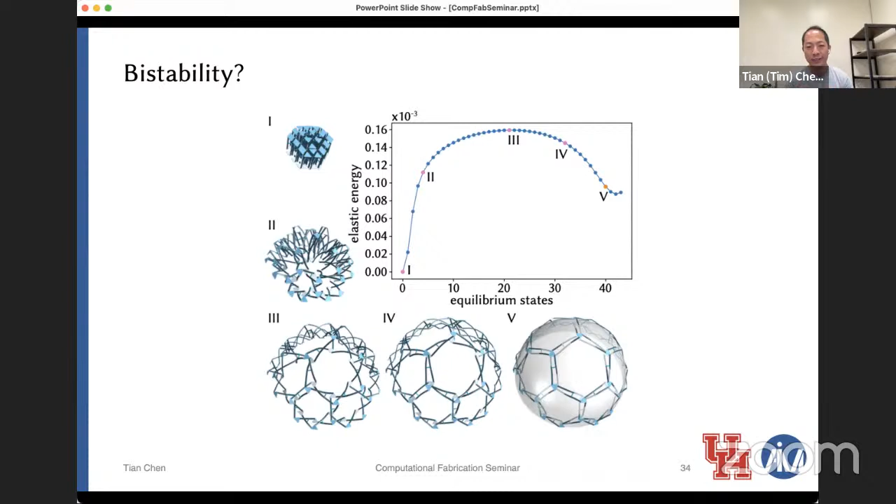We don't exactly know why yet, so this is something we're still looking into. For positively curved structures, we have an intuition, but this also happens for negatively curved structures.

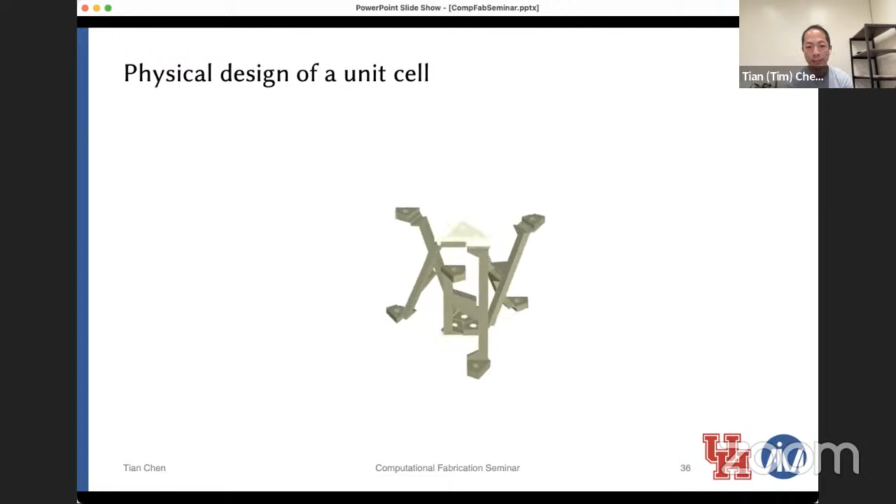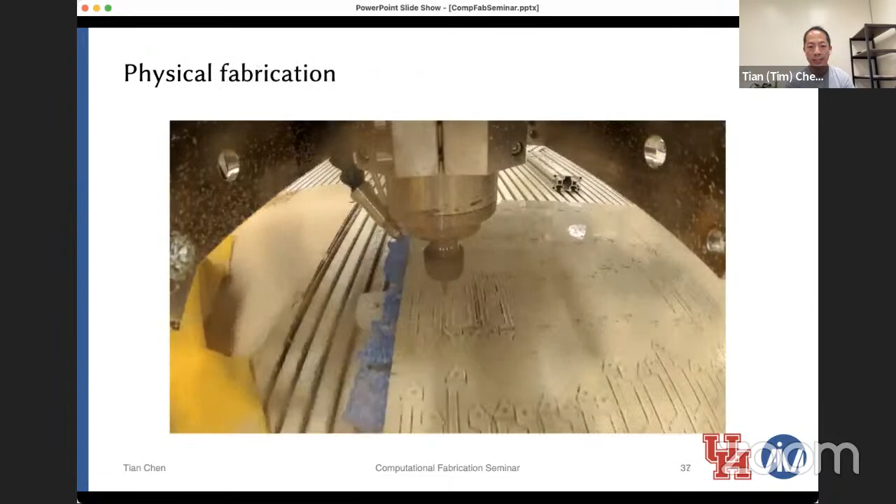Now we move to the physical design of the unit cell. We cut these scissor mechanisms and attach the top and bottom plate. You see this is the transformation that happens through these living hinges or elastic joints. The fabrication is, again, planar and very simple.

We use a milling tool that's able to fabricate using polypropylene as material. We assemble these manually to create the compact state, and then we deploy this into the 3D state.

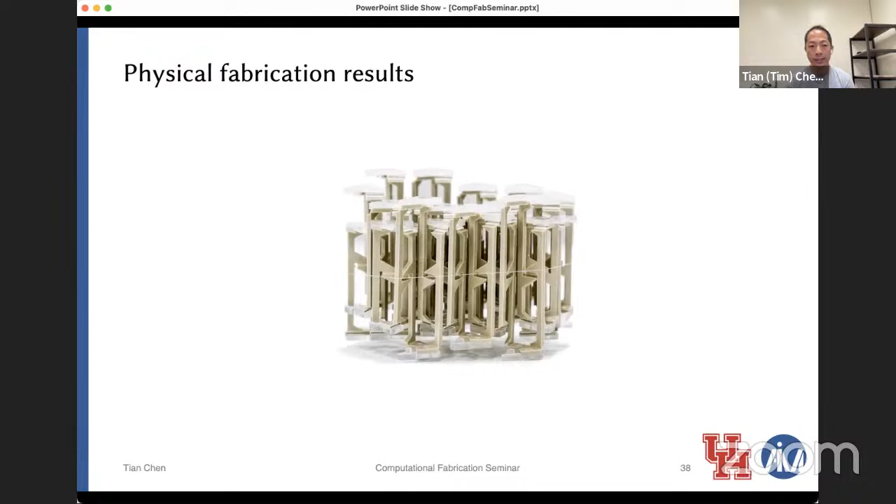Here's the deployment of the sphere. You can see the scale of the model relative to a human being. It takes 2 people to deploy the sphere into its final deployed shape.

Lastly, I want to mention the reason we started this project is to take advantage of 3D printing. This is maybe something that was missing from the talk. So now I'm experimenting using selective laser sintering to make these 3D umbrella structures, and we have some success in deploying a hemisphere again.

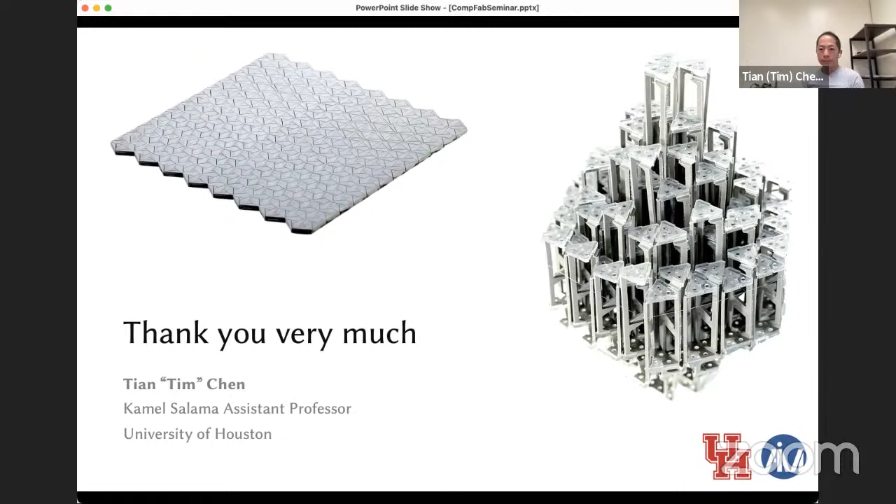For the bistable morphing structures, are they limited to being bistable, or could they go into multiple configurations? I guess we could also extend this question to the auxetics, whether they could potentially have 2 or 3 configurations as well. That's a good question.

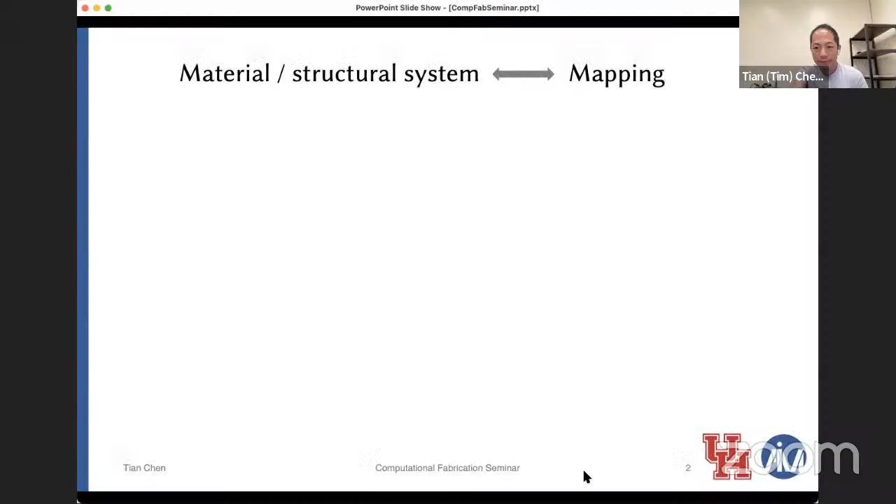Let me go back to the very beginning of the talk, since this exactly answers your question.

With many bistable units tiled next to each other, each unit cell can snap without the neighboring one snapping. So these are, in fact, all the intermediate states. Of course, we didn't design for them, but they are stable states that we can achieve.

But in this project, we explicitly designed for a planar structure to transform into 2 different global 3D structures, having 1 set or 2 sets of the bistable units triggered. So the diagonal length goes from length 1 to length 2 or 3, and globally they go into 2 different structures. This is just a picture of a unit cell, the exact same unit cell that goes into the 2 shapes below.

For the auxetic sheets, that's something we don't know how to do yet. That's something we're looking into.

And how consistent is the fabrication process of the bistable triangular linkages via laser cutting? Does it sometimes happen that the joint is cut through or not cut enough for deployment?

Right, so that's something. At the beginning of the project, we thought we needed to make the joints as thin as possible to maximize this bistability.

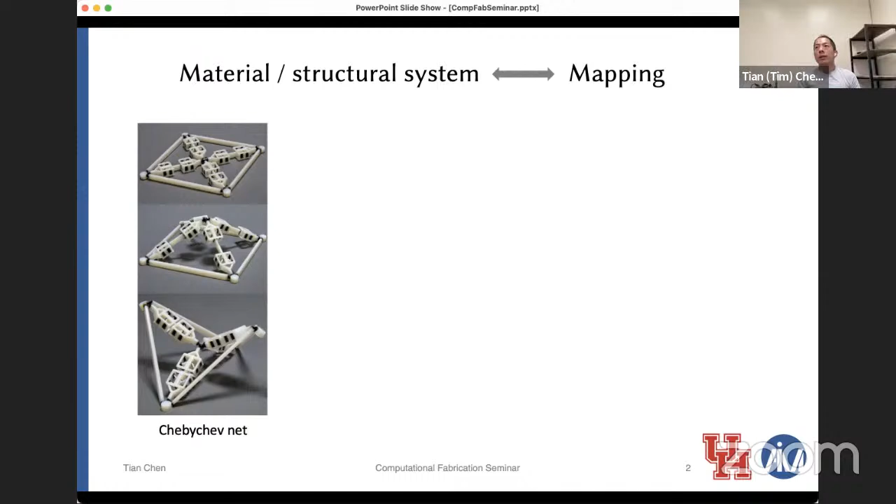Right, oh yeah sure, that's a good question. For example, a perfect hemisphere could go up or could go down. For the first project, we don't handle that — so indeed I don't have any solution. For example, this one could go up or down. There are more isometric deformation modes than we consider.

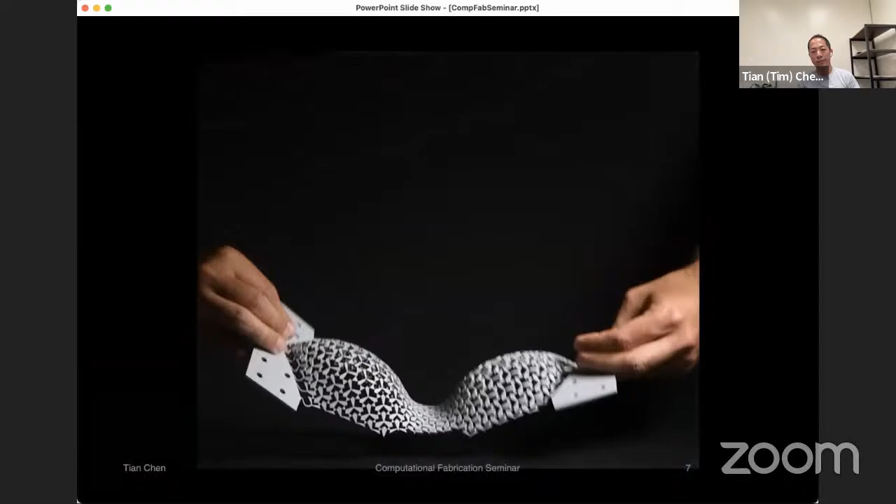So we do need to mechanically help it go into the right state because we can't control the mean curvature of the system. But that's one feature of the second project, which we are able to handle — let me go to that particular thing.

Because we have the midplane, which is what the conformal mapping tells us how much it needs to expand. And then we have the height above the midplane and the height below the midplane. We could set them to be the same to achieve the Gaussian curvature we needed, but we don't have to.

So right now we do consider mean curvature and adjust the difference between the top height and the bottom height, such that it only deploys in one direction. So in this case, for a hemisphere, the height above the midplane is bigger than the height below the midplane. In a sense, we have two layers of structures that give us an intuition of mean curvature in addition to Gaussian curvature.

Oh, very interesting — so this way you can program both sides at the same time, and therefore there is no symmetry anymore. Exactly, right. So we could have an up bump and a down bump, two bumps in two directions. Nice.